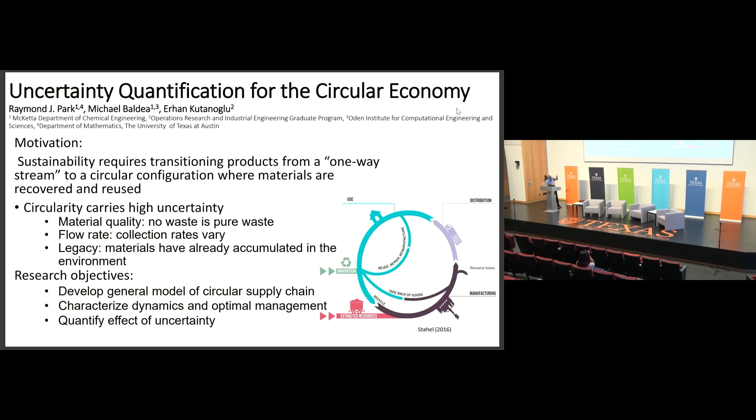This project has finished already, and we have a published paper in Computers and Chemical Engineering. The student isn't listed there, but should be here: Ray Park, who was a student in chemical engineering and mathematics. He graduated already, and he's at Rice at this point as a graduate student.

This is basically a project where we try to quantify the effect of uncertainty in circular economies. When we say economy, we are not looking at the whole economy of a country, but at a supply chain. We are trying to see how recycling or recovering material is used in conjunction with fresh virgin material in a supply chain that produces things, and then we collect the waste, and see how the uncertainty would be affected.

Mainly because circularity apparently carries high uncertainty. Material quality is an issue, flow rate is an issue from stage to stage, and there are also legacy issues related to materials that have already accumulated in the environment.

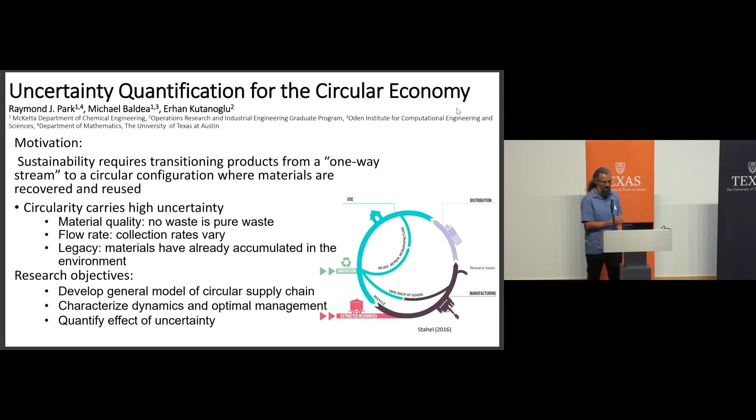Like I said, we developed a stylized, quite simplistic model to quantify these things in a circular supply chain, basically one entity feeding another entity, and then we characterize the dynamics of the problem. We couldn't do a whole lot on optimal management, but we tried to quantify the uncertainty for sure in this simple model. This is basically the state task network.

I didn't know about this kind of tool before I got into chemical engineering and started talking with my colleagues about this. But ultimately, the material process starts — well, it's a circular thing, but at least to explain the process, I want to start from the left bottom. You basically combine some raw material and convert it into a finished product, you manufacture things, and then the product is being used.

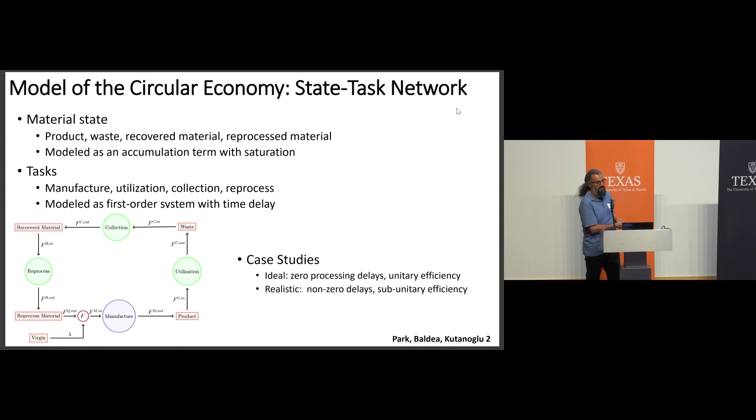It's turned into waste. The waste is collected, and recovered material is reprocessed to be used in some cases in place of the virgin or fresh material, or maybe even in conjunction with the virgin material, potentially reducing the need for fresh, brand new material along the way. It's a rather simple thing.

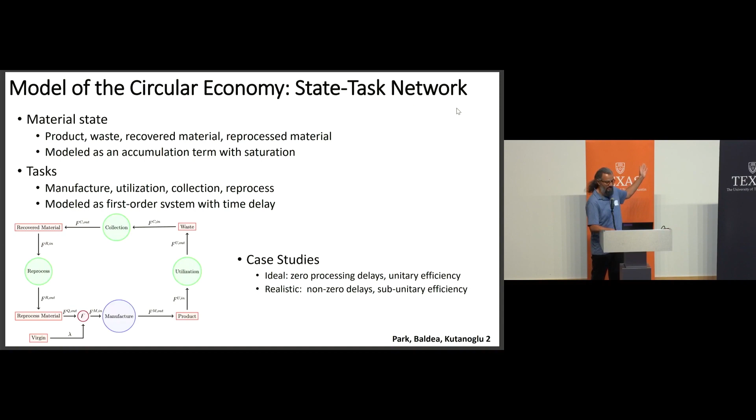The whole thing is a mathematical model, really, and we use the mathematical model to simulate things from stage to stage over time, and then see how things evolve. Since it's a 5-minute quick talk, there's a longer version in the poster, and an even longer version in the paper if you're interested. But this is basically focusing on the simulation part.

Of course, this kind of uncertainty and inventory variability amplification, if you will, has to be controlled if you want to take advantage of control policies. Optimal management of these policies — orders, production rates, those kinds of things — should be updated, and that is the part we are leaving for future work. How do we really manage the supply chain in an environment like this?

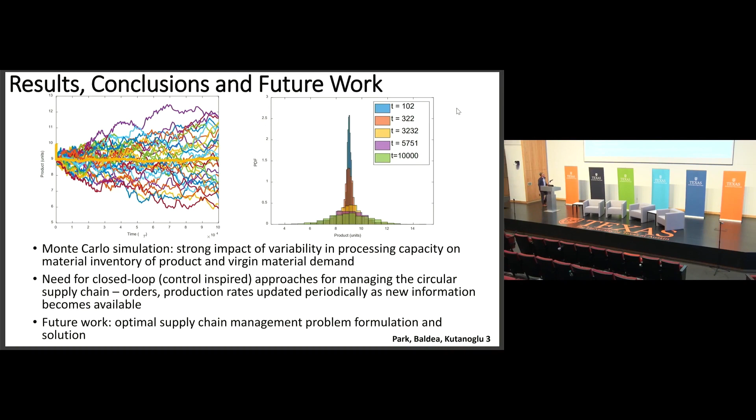Our project was Go Clean Fast, the political economy of green industrial policy. I'm Josh Busby from the LBJ School of Public Affairs. My colleague Nathan Jensen is in the government department, and we appreciated the support from the Energy Institute for this endeavor. The starting premise for the project was that intentional government policy would be required to hasten the clean energy transition. As a result, we started thinking about this project before the Inflation Reduction Act was passed, so we wanted to think about this nascent policy area of industrial policy, which had been out of favor for many years.

So we decided to convene an online workshop in February 2023, and we invited participants to write short memos for us and record short videos to capture different dynamics associated with industrial policy. In part, with the passage of the Inflation Reduction Act, we wanted to discuss what were the political foundations of actually passing the act.

And then another aspect, some of the writers tackled some of the downsides and risks associated with industrial policy, including the adjustment costs for fossil fuel dependent communities.

Other folks drew on the experience of other countries who have already ample experience with industrial policy. We've always done industrial policy in this country, we just didn't call it as such, but other countries have nonetheless tried intentionally to support nascent clean energy industries, and so we wanted to learn from some of that experience.

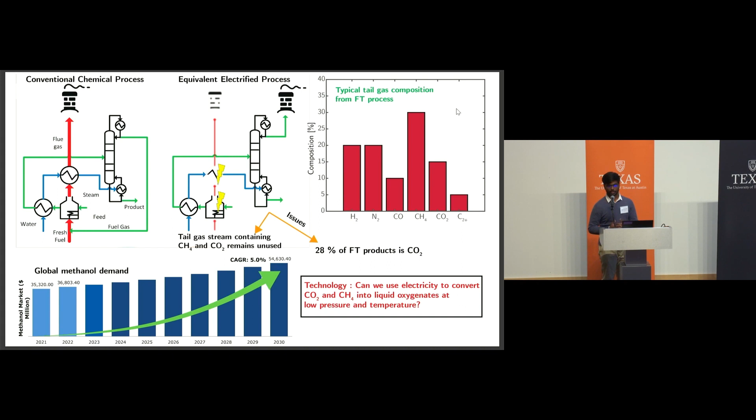However, there is another problem with flue gases and tail gases from these industries. As you can see, for example, in the Fischer-Tropsch process, there is methane and CO2 in the composition of 2:1, and that's, again, a greenhouse gas, which we want to convert. So what if we can use electrical energy to convert those gases as well into a green fuel like methanol? As you can see, methanol's demand is growing every year. So that would be pretty compelling if we can convert these tail gas greenhouse gases into green fuels like methanol.

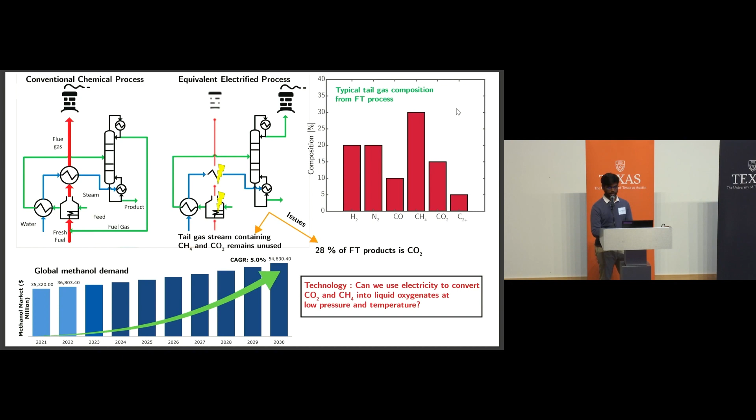Now, what else would be compelling? If we can do this at room temperature and atmospheric pressure. Conventional processes do it at very high temperatures and pressures like 30 bars and thousands of kelvins. We can do it at room temperature and atmospheric pressure. So how to do it? It's using something called plasma catalysis.

So our design space for plasma catalysis includes catalyst activation, plasma excitations, and species transport. When I say plasma excitations, what I mean is we use non-thermal plasmas, and these introduce two different temperatures in the reactors, gas temperature and vibrational temperature. Although gas temperature is close to room temperature, vibrational temperature is almost 2 to 3 orders higher, and that drives the reaction forward, although the actual reaction temperature is room temperature.

But when we add nickel instead of copper, that showed a detrimental effect on the methanol selectivity. We observed 2 times lower methanol selectivity. The reason for that, we think, is the high affinity of methanol towards the nickel catalyst, and it would try to get reduced or oxidized to CO2 or back to methane.

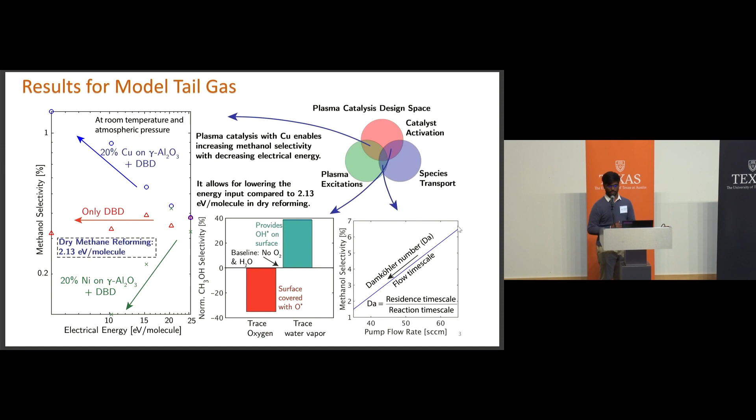Now, coming to mechanism, we're trying to vibrationally excite the species in the gas phase, methane and CO2, because that's the most energy efficient way to excite the molecules. To study the mechanism, we added trace amounts of O2 and water.

When we add oxygen to this reaction, since oxygen has high adsorption energy on any transition metal catalyst, it would readily get adsorbed on any surface, so it wouldn't allow any other reactions to go through on the surface. Therefore, you don't really see much methanol compared to the baseline, which is what we're showing on the plot on the left. Compared to baseline, we observed 35% lower methanol selectivity with oxygen in the reactor, because it's occupying all the active catalyst sites.

On the contrary, when we add water vapor to the reaction, it forms OH radical instead of O on the surface, and when you form methyl radical in the gas phase, that would get adsorbed onto the surface and form methanol readily. That way we observed almost 40% increase in methanol selectivity compared to baseline.

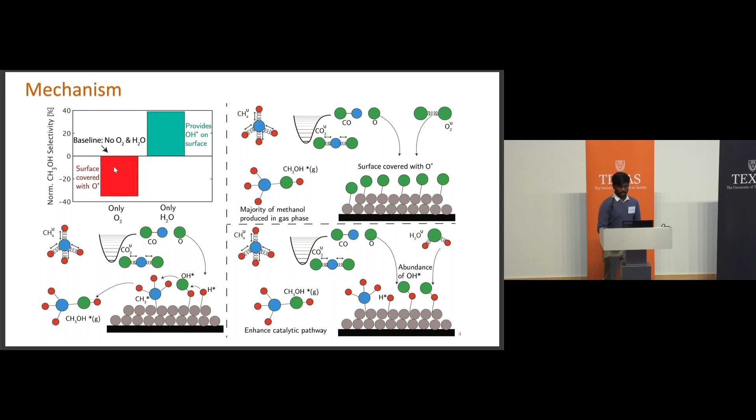So next is modernizing brownfield electric power systems reliability and quality to support the electrification of industrial processes.

So is the presentation. Oh, okay. I think you can use this if you want to. Okay, thank you. Does the mic work? Okay. So, hello, everyone.

Today, I'll be presenting our research work for modernizing brownfield electric power system reliability and quality to support the electrification of industrial processes. I'm joined by my colleagues, Moises Chong and Woo-Sung Kim, who also collaborated in this project. And we were guided under the leadership of Dr. Surya Santoso, our PI, and our co-PI, Dr. Brian Johnson, as well as our collaborator at Shell, Dr. Lei Jiang.

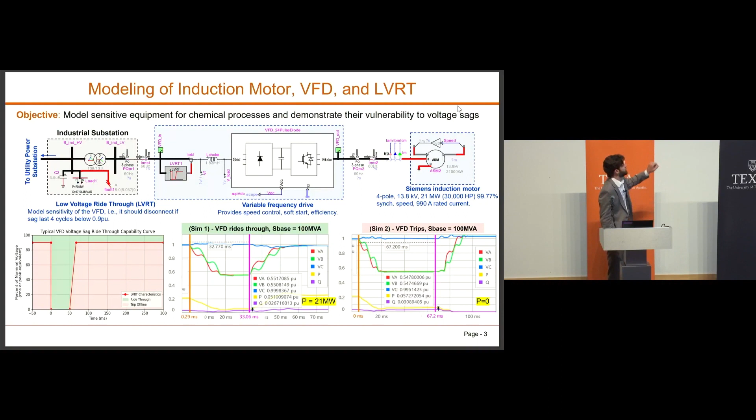We show two simulations. In the first, we show a fault of 2 cycles. This fault is in the green segment. The voltage drops down to around 55%. The power goes down as well. The fault is cleared on time in the green segment. Voltages return to normal, and the power goes back to 21 megawatts. In the second simulation, we show a fault of around 4 cycles. This barely touches the red zone of the capability curve. The breaker opens, and the VFD no longer operates.

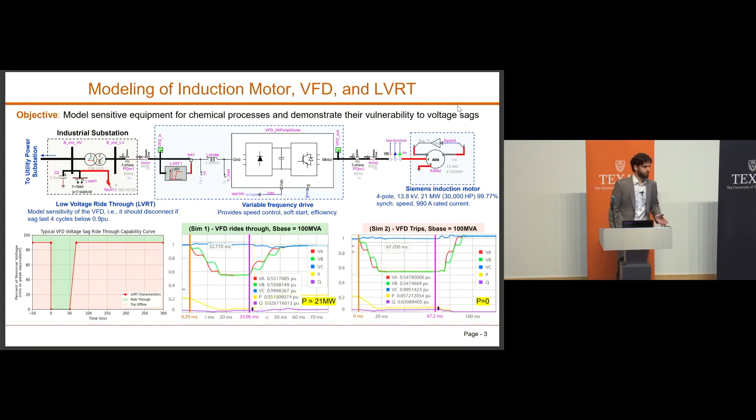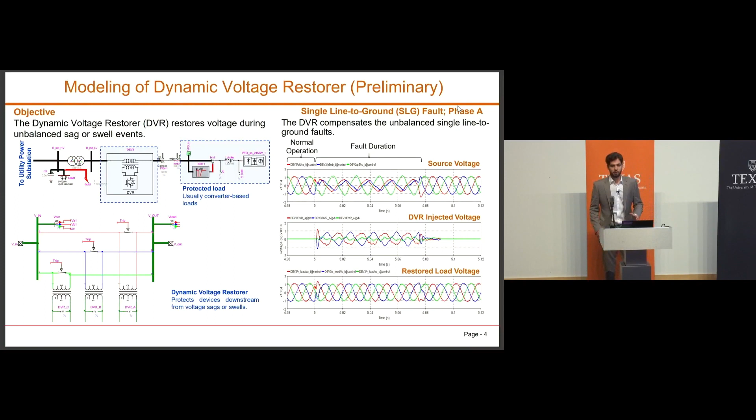The presentation will be the effects of surfactants, salt concentration, and suspended solids on selective oil permeation.

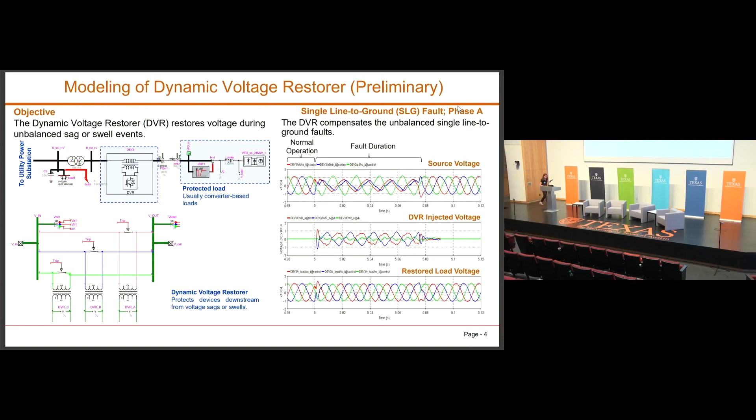Hi everyone, my name is Julia McGuire and I'm a first-year master's student working with Dr. Lynn Katz and Dr. Frank Seibert on this project to understand the effect of surfactants, salt concentration, and suspended solids on selective oil permeation, specifically with the goal of applying this technology to produced water treatment.

As depicted on the top left image on the slide here, produced water is a major byproduct of the oil and gas industry, and it is essentially any water that comes up to the ground surface during the oil drilling process. Produced water can be highly contaminated, containing dispersed and emulsified oils, high concentrations of dissolved solids, suspended solids, and surfactants, along with many other constituents depending on the subsurface geology and chemistry of the specific reservoir.

Currently, due to this complex and highly variable composition, produced water is very difficult to treat, resulting in the majority of produced water simply being disposed of, usually in the form of injection into deep underground wells. As the threat of water scarcity increases, the push and drive for the reuse of produced water is increasing as well. But again, due to the complex composition of the water, it is often quite costly to treat. This project is looking to see if membrane technologies, and specifically selective oil permeation, can play that key role in achieving the reuse of produced water and contribute to the circular water economy.

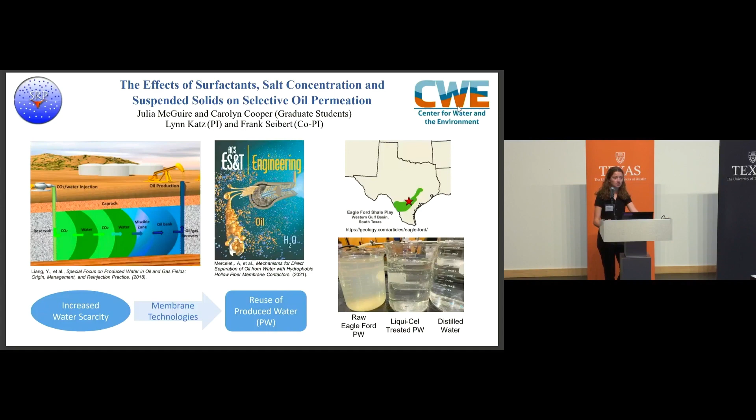Our process has been tested with multiple different synthetic water compositions, as well as on real produced water samples from the Eagle Ford Basin in South Texas, as can be seen on the right-hand side of the screen. The bottom right image compares the untreated raw produced water influent to our system to the Liqui-Cel selective oil permeation membrane treated effluent. And you can see visually comparing the effluent to distilled water, we're seeing really effective results in removing this oil.

So now let's take a look at how we've set up this process experimentally. The process begins by injecting an oil of known mass into a recirculating oil stream where it is emulsified into the water before being sent to our first membrane, membrane A. The effluent from membrane A is then sent to the larger of our two membranes, membrane B, where any residual oil is removed.

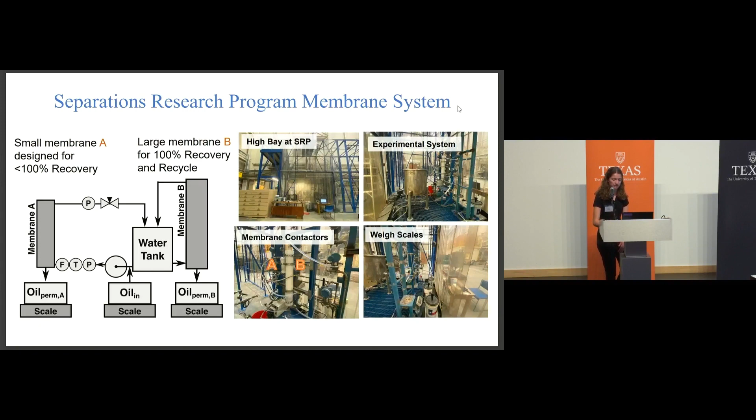The permeates from both membranes are sent to weigh scales and measured in order to obtain an oil mass balance for the process. Weigh scale outputs, pressure transmitters, and aqueous flow rates are all monitored, and the data is captured and stored using a data historian. We obtain the oil recovery efficiency data from membrane A under different process conditions and water compositions. So you can see the process flow chart on the left here, as well as some pictures of the actual setup at our high bay at the Pickle Research Center here as well.